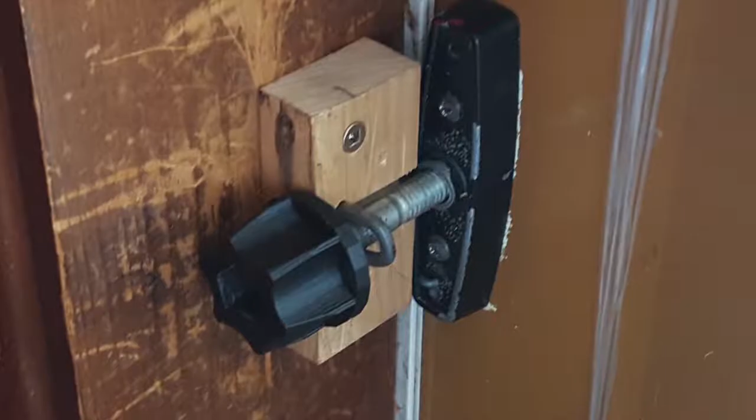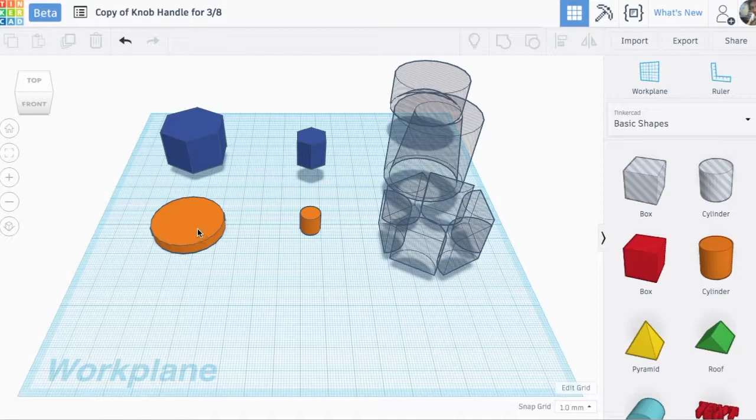You've just seen copies of my 3D prints for the doorknob. I've taken a 3/8 inch bolt and pushed it into a 3D printed part, and that makes a handle for it. The way I've done that is by using Tinkercad, taking two shapes: a cylinder and a hex.

You can see the dimensions there, 30 by 35 for the hex and 35 by 35 for the cylinder. I'll take those, align them,

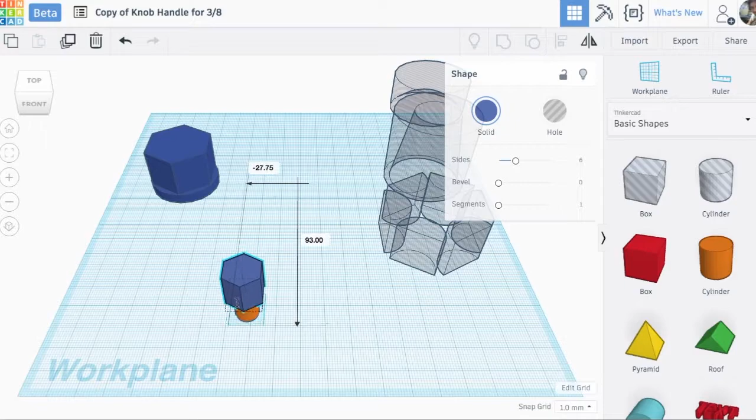and then group them, and that forms them into a single piece that can be moved around. Now I need to cut a hole for the bolt. Here's the round portion of the bolt, 9.4 millimeters in diameter, and the hex head of the bolt is 16.25 by 14.25. Since it's a hex shape, it's not square, so you measure with a caliper across the short sides and across the pointed side, and that gets you a hex in Tinkercad.

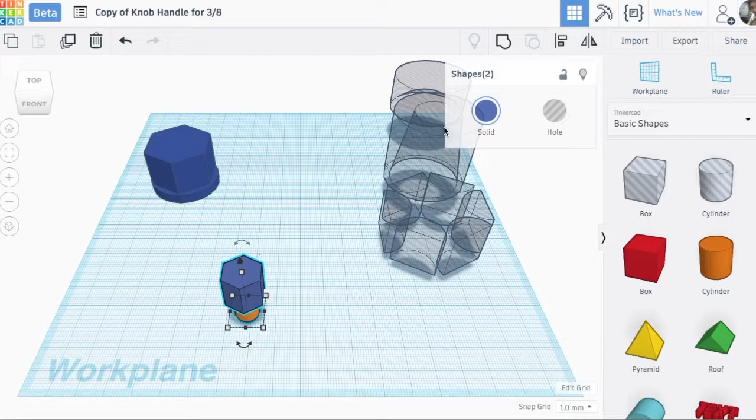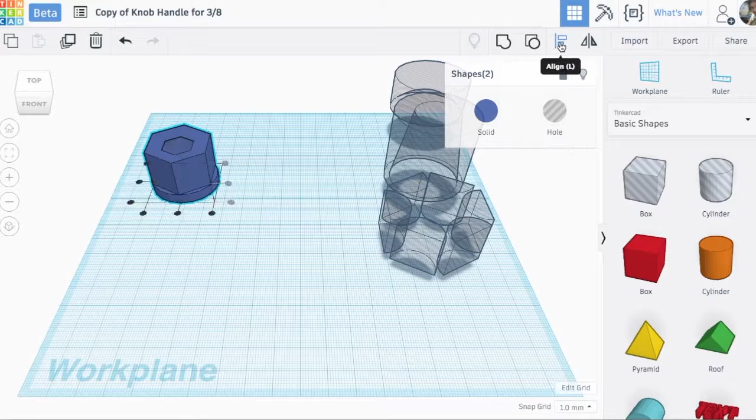I'll do the same where I select both, align both, and then group both, except in this case I use this function here and turn it into a hole, because I want to have a recess to stick the bolt through. Now I place the hole over the handle portion, do the same with the aligning and grouping. When you group a hole with a solid, it cuts out the shape. So now I have the opening for the bolt.

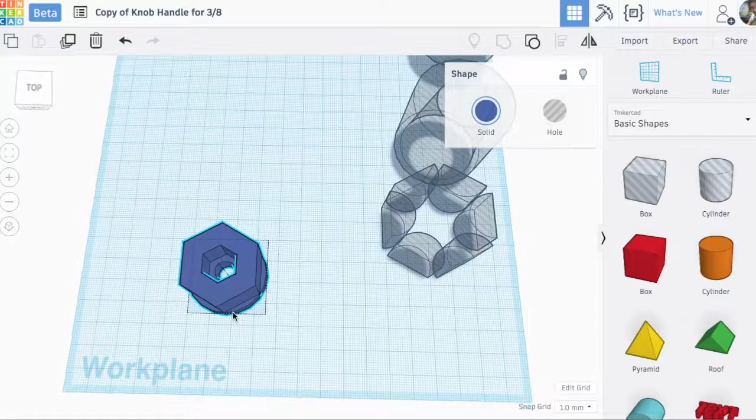Okay, so now I just have a hex shape, and I'm going to be turning this with my hand, and it would be nice to have some impressions here for my fingers to get a better grip. So I've taken this element called round roof, turned them on their edge, rotated them around, grouped them, and then turned them into a hole.

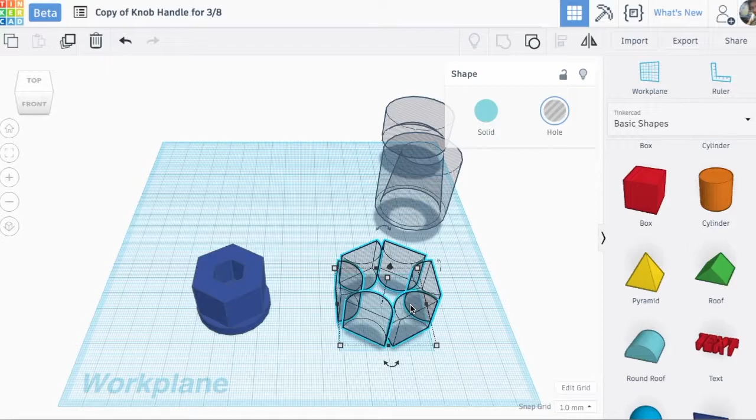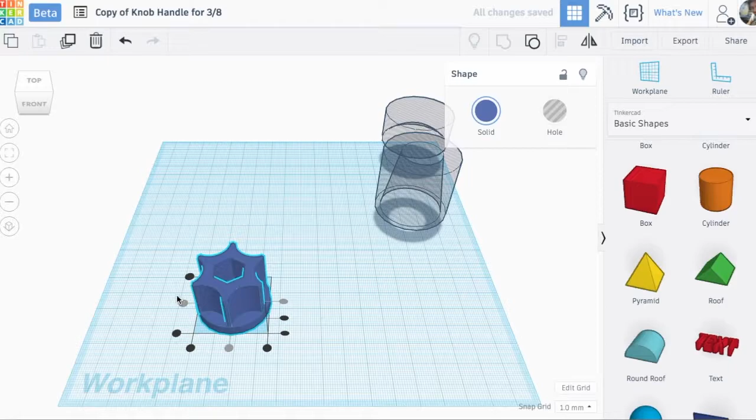And then I set them over, selecting both, aligning. It looked pretty good aligned — the grayed out means I did get it right there. And then grouping it. So now you can see I have nice recesses where my fingers can go in and grab it tight.

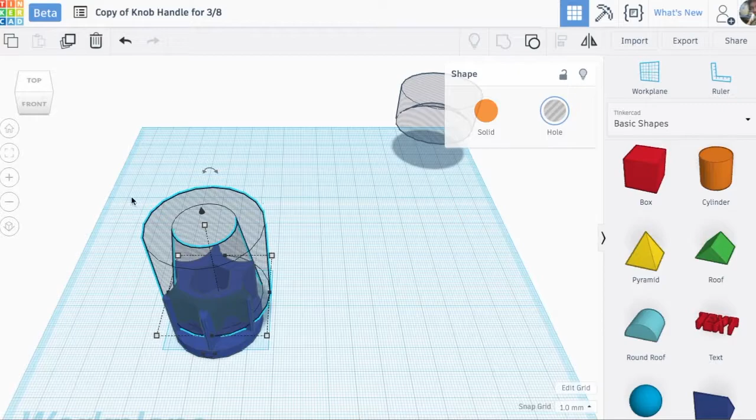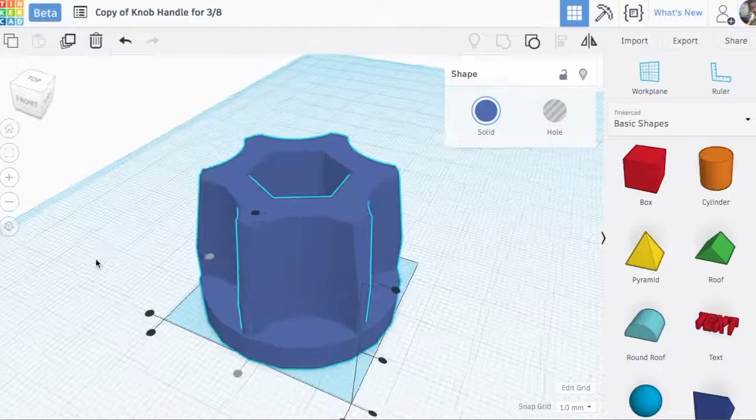Now for this handle — the door jamb isn't quite 90 degrees like the first one. So I've taken this shape: a cone, which I drew very tall to get a steep angle, and then I carved the cone out of a cylinder and turned the cylinder into a hole, and that's what's going to carve my flutes at an angle. So again, typical fashion here: align and group. You can see quite easily that the flutes are cut back so they won't hit the wood when I'm tightening it in.

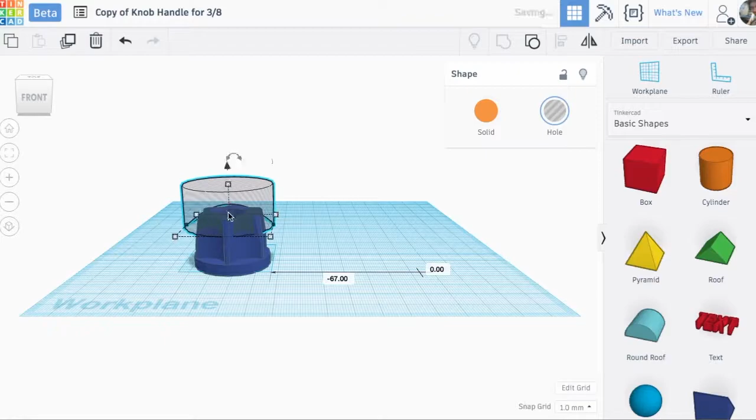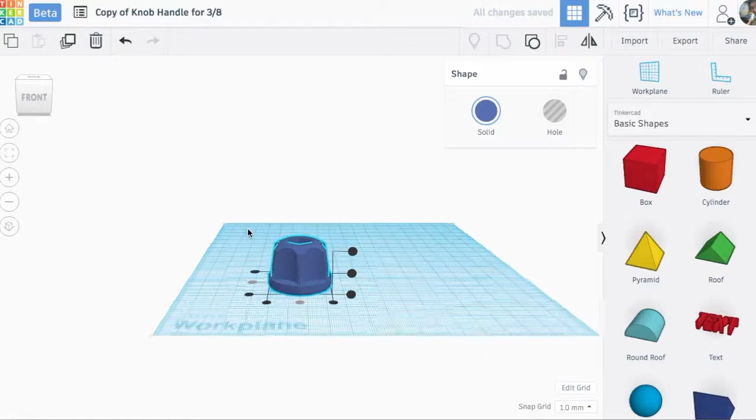Now I've prepared this extra piece here — it's a parabola that I've cut out of a cylinder and then made into a hole. That's going to cut a nice curve on the top, so there are no sharp edges. When I put my hand over it, it feels nice. So I've aligned it, grouped it, and you can see it looks kind of like an acorn nut.

And that is the finished part, ready for 3D printing. So all I have to do now is export this, and then I can go and run the 3D printer.